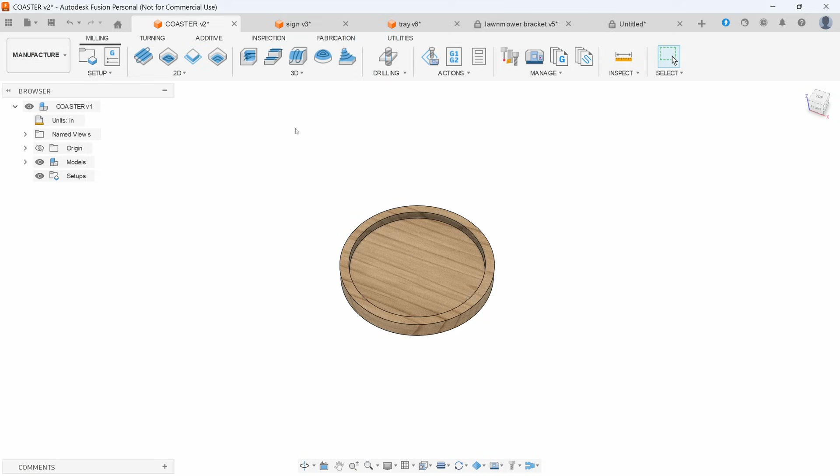The first thing we're going to do is just click 2D Pocket. The tool we're going to select, I'm going to select this 1/4 inch end mill. There's also a ton of vendor tools you can go through, fill in the information, and go from there. My speeds and feeds are typically 12,000 RPM and 100 inches per minute. Most of these hobby machines can't do much more than that. You can always check the manufacturing data to get a rough idea of where you should start.

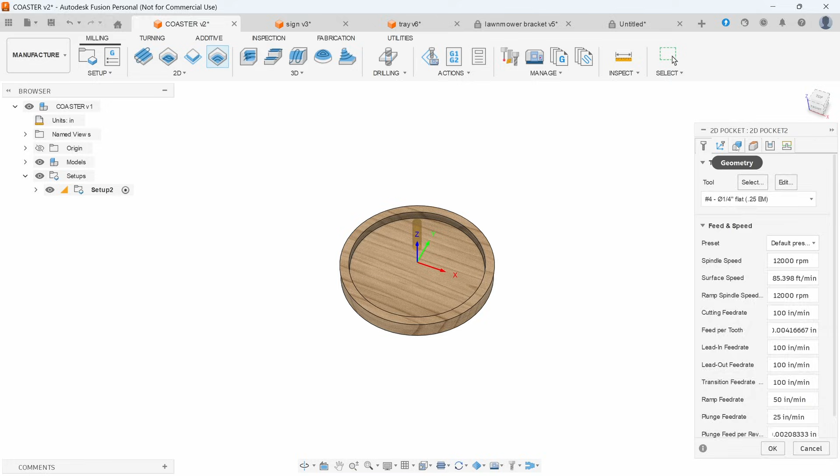So we're going to be using a 1/4 inch end mill. And then once we have our tool selected, you're going to go to the Geometry tab. Click here and press OK. And there you have it. That is your first program on the CNC. So that's literally all you need to get your first program programmed.

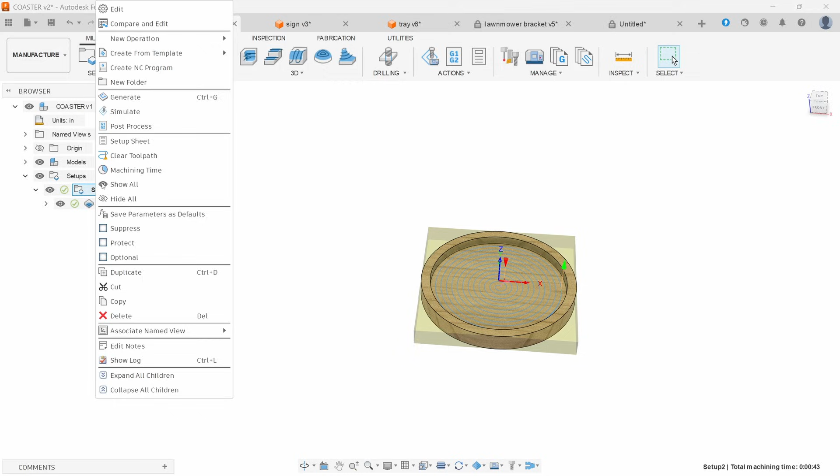But there's a few things we're going to change on it. The first thing we want to actually do is look at our setup. Over here, you're going to see a setup file was created. You're going to right click, say edit. This yellow box is basically the piece of wood that you're going to be cutting into, it's your stock. And you can see that because we made our model on the top plane, starting from the origin, the Z-axis is the same as in our design tab, as are the X and the Y, which makes cam life a lot easier.

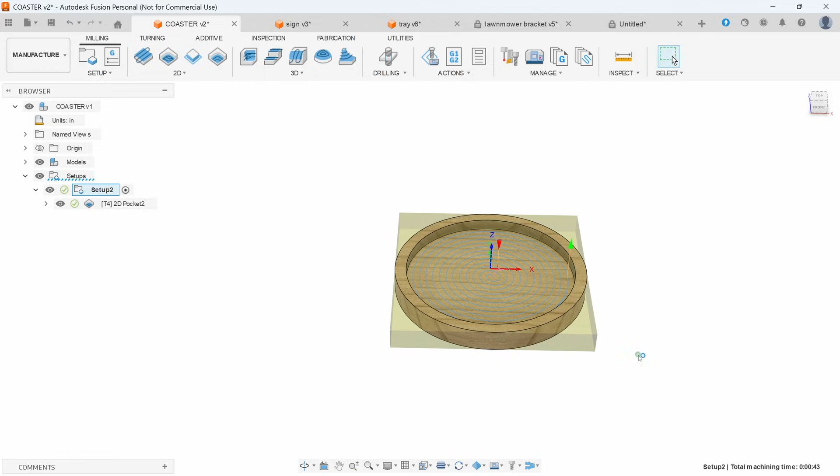Although this is all you need to do to get a program running, I do want to show you a couple things that you might be interested in. So over where this program is, you're going to right click and say edit. This will obviously open up a tab so that you can edit anything that you've already done. We picked our geometry, and these are the heights.

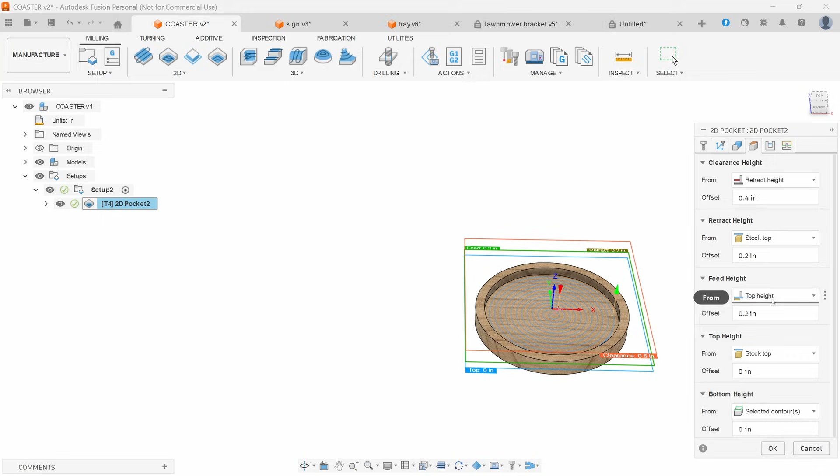Basically you have a clearance height, a retract height, and you can see that the feed height is 0.2 above the top surface, and the green one is this feed height. You can see that kind of change as you click and drag it. Bring that down there. The bottom height is where the selected contour is. Every once in a while you might want to change this, but for the most part, this tab is going to stay the same.

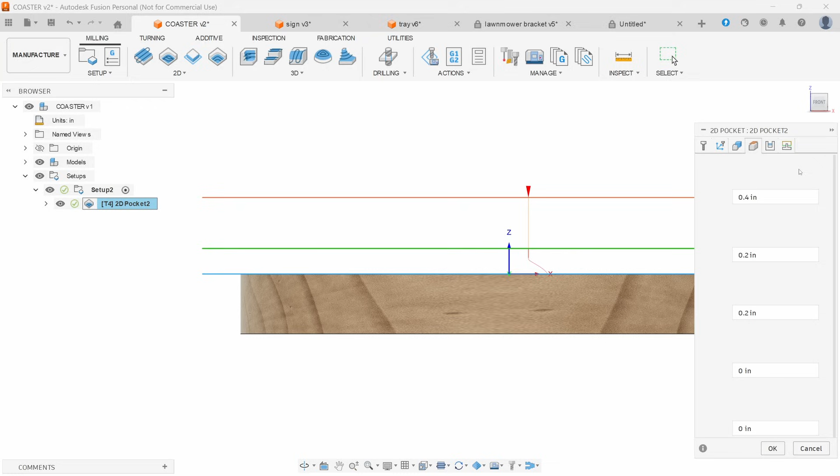But in the passes tab, there might be some things you want to change. This has stock to leave already checked. For this program, just to keep it simple, I'm going to take this off. The only thing I'm going to change is multiple depths. I'm going to click on multiple depths, and I'm going to make the maximum roughing pass to 0.125. What this does is make sure it doesn't really dig in and push the material out of the way. We're going to be using the blue tape method, so I like to be very conservative on my depth of cut.

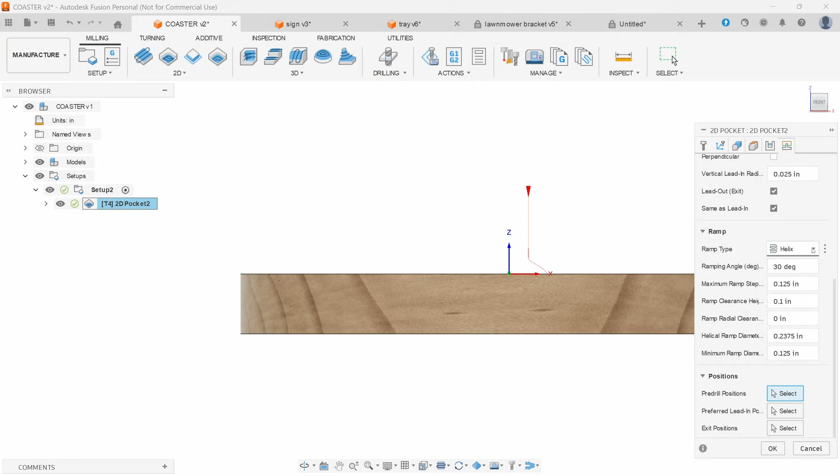That's the only thing I'm going to change in here. This is the one that you kind of want to remember in case you're doing deeper pockets especially. Then over in the linking tab, once again, we are just going to leave everything in here the same. But it's good to know that you have a bunch of different options, and I highly recommend going in and playing with them. It's kind of cool that you can change them and then see how it changes within the program just visually. So we'll press OK.

So now you can see rather than just one pass, it's doing 2 passes. You can see 2 lines in here. So that's at 2 depths. Now we're going to do our contour cut. Basically we're going to cut out our coaster. For that, we'll do 2D contour.

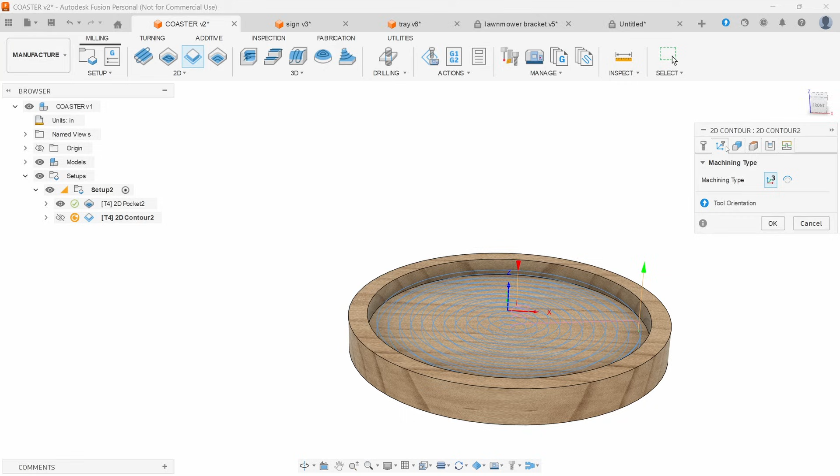It selects the latest tool you were using. We can skip the multi-axis tab. We'll go to geometry. We're going to click this bottom profile and we're going to press OK. And once again, you can see that it makes a program for you. That's all you had to do. You just had to click your profile, but this bit is plunging straight down and then ripping around.

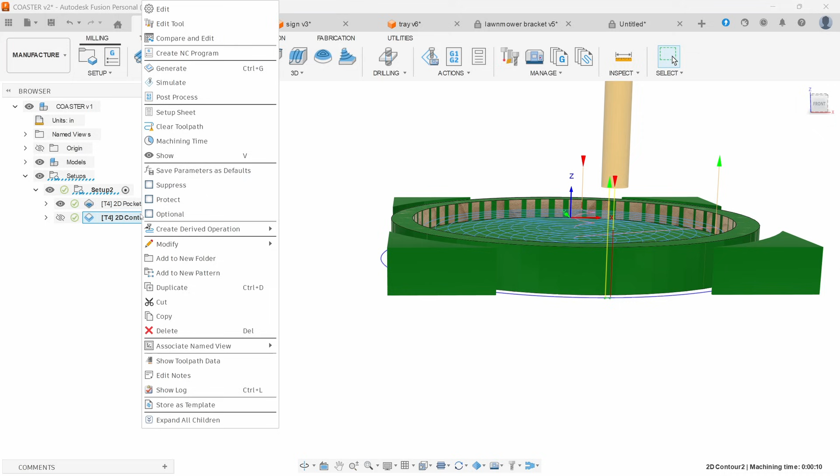Especially if you're doing a blue tape method or you don't have any tabs in, this will not work. You're going to start turning this piece. It's literally not being held down by anything. So we're going to change that. We're going to right click and say edit. Go into geometry and we'll add some tabs for this one. We're going to do a 1/4 inch width, 0.125 height.

And the tab distance, we'll do a 3. And now we'll press OK.

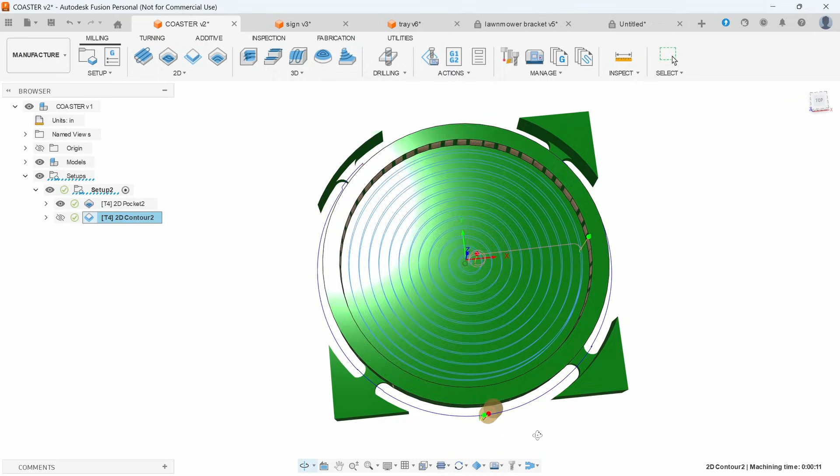So it's still going straight down, which we probably don't like, but at least now it's being held in place. Now, we're still asking an awful lot of our bit to go straight down like this and do a full profile cut at the full depth. So we're going to edit that next.

So we'll go to the 2D contour, right click and edit, but we'll head over to passes. We're going to scroll down to multiple depths. It's already set to 0.125, and we'll just leave that as it is.

Obviously, there is a lot more, but to get you started, this is the main one I would remember - multiple depths and keeping it more of a shallow pass, especially if you're just starting out.

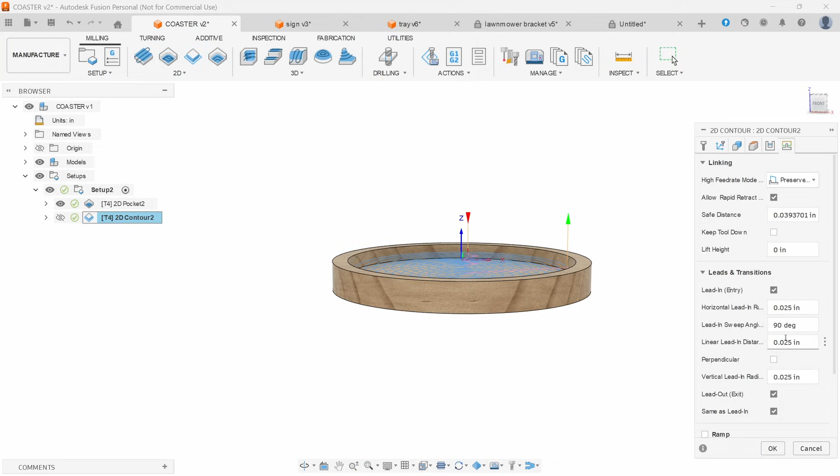Now we'll head over to the linking tab. Once again, take a look at what everything is. If you hover over these 3 dots to the right, it will give you some more detail of what each thing is. But for now, we're just going to leave that all the same. I want to keep this as simple as possible for you. Press OK. And that's it. Now you have a working program.

But like I said, these tabs are great if you're going to be using clamps, but I'm actually going to be using the blue tape method. So these tabs aren't really necessary.

So I'm going to go back into our 2D contour, say edit. We're going to turn off tabs. And under multiple depths, there's a finishing step down. And what this does is it'll be some very small steps at the bottom.

I want to do 1, and I'm going to make it 20 thousandths of an inch. This gives some area for the part to hold down before our final cut. So the last cut is pretty shallow and won't take a ton of force to cut through that last bit.

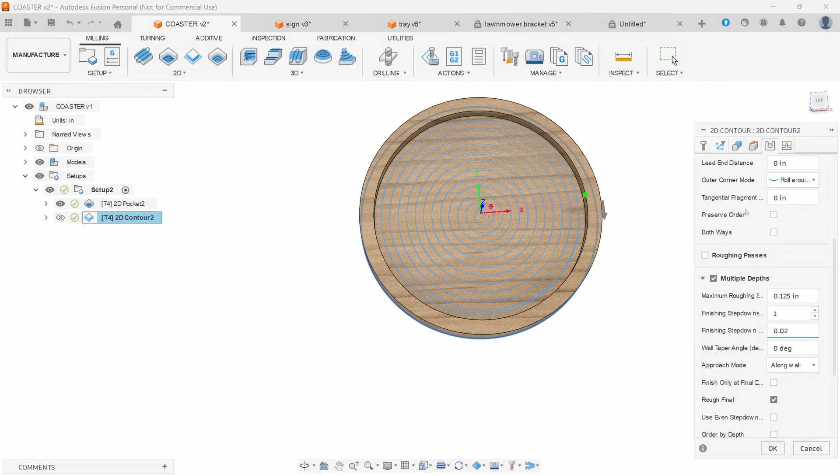And we'll press OK. There we go. Once again, we can go to our side, and you can see that there's a small step down here before it hits the bottom. So this is really all you need to do to get moving with your CAM. It's very simple. Fusion 360 has come a long way and makes it quite easy to get started.

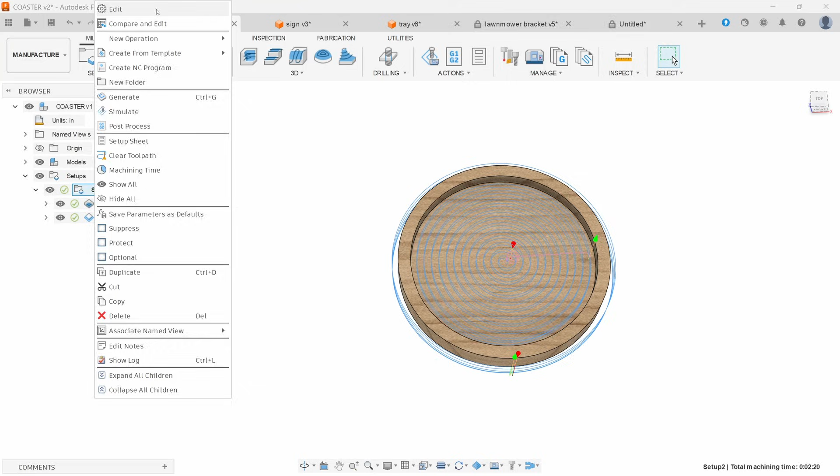I do want to show you a couple things in the setup really quick. So we're going to right click and say edit. Typically, you're going to have a bigger piece of wood or stock. So we're going to go into the stock and we're going to change the relative box size to a fixed box. And the way to imagine this is you have a chunk of wood, and that chunk of wood's already to a fixed size.

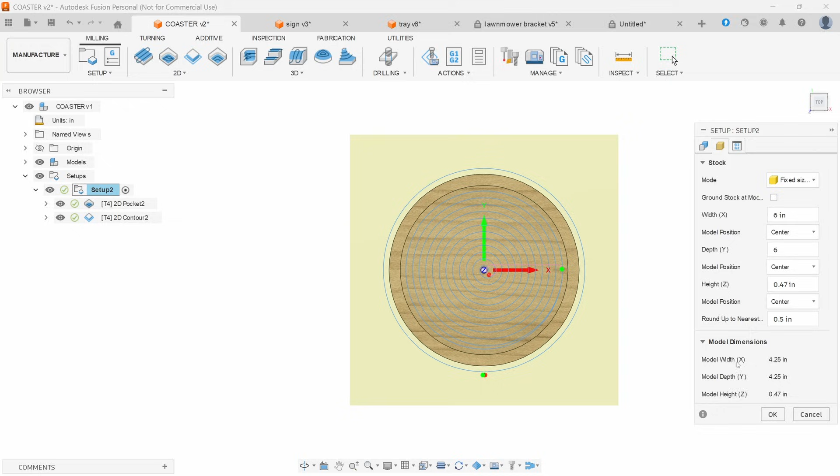So we'll change our height to 0.47. And let's just make up numbers. Let's say we have a 6 inch by 6 inch. So now our stock is a 6 by 6 by 0.47, which might be a perfect piece of ply that you have. And we'll press OK.

And an error pops up over here saying that the model's not right anymore. We can right click on our setup and say generate. It'll go through and it'll recalculate everything for you.

Now all we need to do is make our, once again, we're going to hover over setup, right click and say create NC program. If this is the first time you're opening it, you're going to want to change your post. It'll probably be empty.

So you're going to click on this folder. And then under the Fusion library, there's going to be a ton of them and you just need to figure out which one you're going to be using. For me, it was the ArtSoft Mach 3, wherever that is. ArtSoft Mach 3 mill. Select it and press OK.

You're going to name it, and I usually name mine what it is, the bit I'm going to be using, and then the size of the stock - 6 by 6 by 0.47. This way I know exactly what I'm cutting into and what I'll be cutting.

The rest on this side can stay the same. And then over on this side, the only one I change is the safe retract. Typically it'll be set to G28 or G53, but I like to just set it to clearance height. And what this does is once the program's finished running, it's just gonna lift up to the clearance height that we have set in our program.

Now we can say post, and it's saved under Documents, Fusion 360, NC Program. You'll see Coaster, and you'll see it right here. So that's it. You made your first G-code program for your CNC, and the next step is going to be